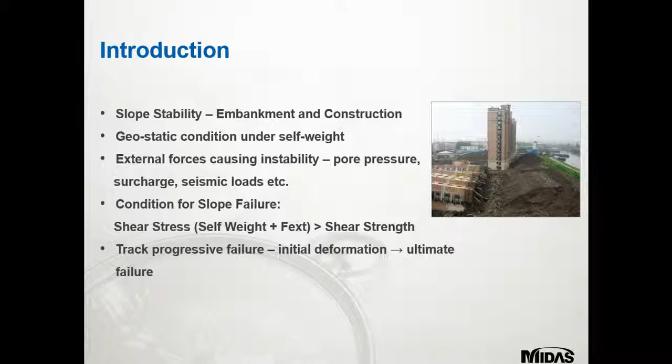Failure in a slope occurs when the shear stress generated due to the self-weight and external force exceeds the shear strength of the ground material, i.e. if anything's added to the slope, then it will cause it to fail. In any slope stability analysis, the important task is to account for the progressive failure surface. The failure starts as an initial deformation, which then propagates throughout the whole slope, causing the ultimate failure.

So just moving on to the next slide. So here's our graphics for this. As you see in stage 1 there, the slope is under geostatic condition, under its own self-weight, so it's completely stable. In stage 2, the instability is caused by external forces acting on the slope. As you can see, we've got the FEXT, or the external forces acting on it. And then stage 3, the failure occurs when the induced shear stress, T, exceeds the shear strength of the material. So as you can see, you've got T and W.

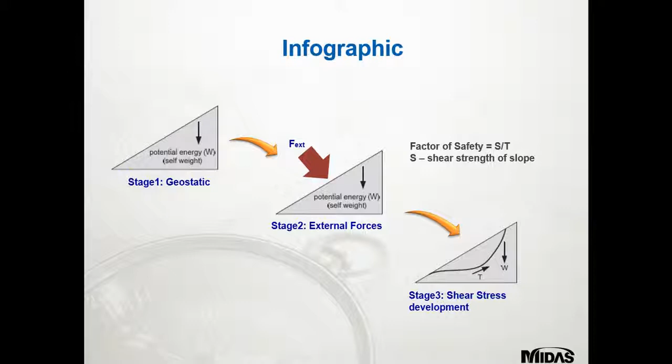So now we're going to focus on the numerical approaches for slope stability analysis. Two analysis approaches are considered: the limit equilibrium method and the finite element method. So first of all, we'll just focus on the LEM and the analysis principles. Divide the slope into vertical slices and calculate the safety by considering the equilibrium of forces and moments.

For the finite element method, it requires finite element modelling. Ground material is represented through constitutive models. Material behavior is non-linear in the form of the plastic and elastic method, or the elastoplastic theory.

So for the analysis results, you get the results for the factor of safety and the critical failure surface. In the finite element method, you get the results for deformed shape of the slope, the stress distribution, and the factor of safety. For the input data, you get the input cohesion and friction angle for soil layers in the limit equilibrium method, or LEM, which I'll constantly refer to during the webinar. For the FEM method, it is the input cohesion, the friction angle, the elastic modulus, the Poisson's ratio, dilatancy, etc. for non-linear analysis.

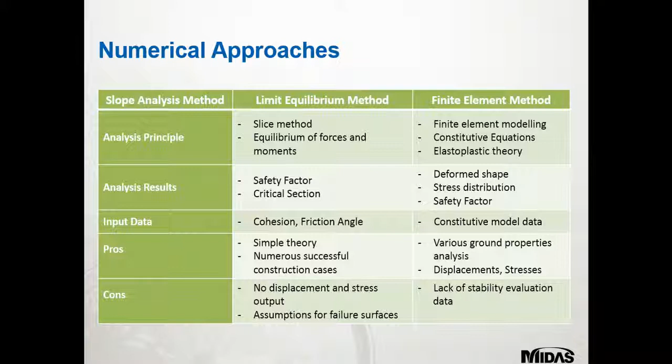So now we'll look at the reinforcement for slope stability. Just to start off with anchors, which increase the resistance of the slope against sliding. Anchors can be pre-stressed as well, where you can have the pre-stressing and part anchorage resistance to the movement of the soil mass. Nails are the most commonly used reinforcement. Nails are easy to implement as they require no pre-stressing, but that has to be compensated by larger cross-sectional areas, and based on the cross-section, the resistance could be axial or in the shear direction.

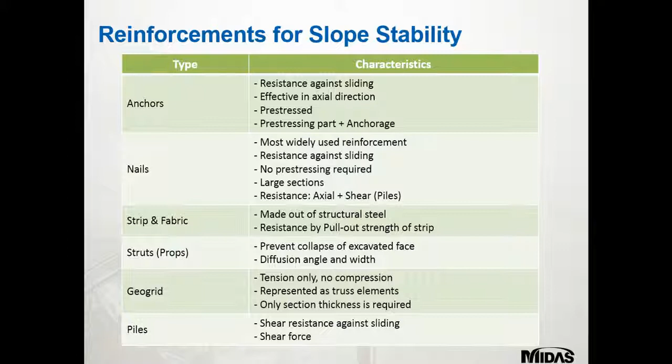So now just briefly talk about the strip and fabric, which is made out of a steel structural material and is resistant to pull-out stresses. It has a pull-out strength. Geogrids are reinforcements that resist loads in the axial direction only. Only tension is resisted and no compression is supported. Hence they can be represented as truss elements in finite element analysis. And just finally, piles. Piles can be used as reinforcements for slope stability. The main resistance against sliding comes from the shear friction along the pile shaft.

So just moving on to the finite element method, or FEM. Finite element is a precise method for analysing slope stability, as we don't need to make assumptions for failure surfaces. In finite element, for the model domain, force equilibrium, nodal compatibility conditions, constitutive equations for ground material and boundary conditions along model edges are satisfied. It simulates the actual failure mechanism and automatically determines factors of safety and failure behaviour in the slope based on non-linear analysis. In situ conditions based on pore water pressure profiles and other things of that nature can be best reflected in finite element analysis modelling.

There are two types of FEM models. The first one is the strength reduction method, or C-Phi method, and the second one is the stress analysis method, which is a hybrid of the limit equilibrium method and C-Phi method. Finite element analysis is an iterative process where for each iteration force and displacement compatibility is satisfied for each node. This increases the analysis runtime in finite element method analysis.

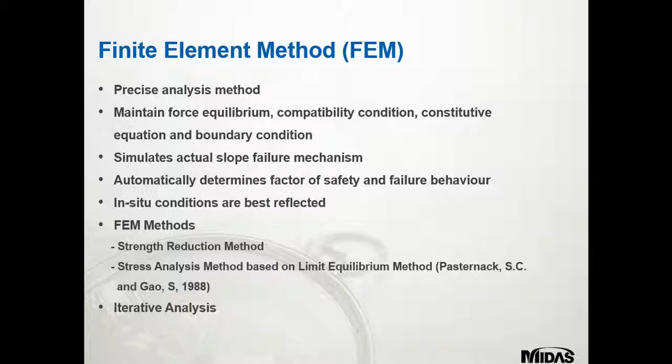The strength reduction method was proposed by Zienkiewicz in 1975. The shear strength parameters, cohesion and internal friction angle of ground materials, are gradually factored down till divergence occurs in the model. This is when the slope is said to be failed. Critical cohesion is given as C critical, which is C initial divided by the factor of safety, and critical friction angle is given as phi critical equals tan inverse of tan of the initial friction angle divided by the factor of safety, as shown in the expressions here on the screen.

It is important, to accurately obtain the critical factor of safety, that the increment should be made in small steps. Typically, the initial factor of safety is kept as 1 from Janbu's method, and then it is incrementally increased. While checking the results for ground deformations, the user should keep the value chosen for dilatancy and the dilatancy angle in mind.

When the dilatancy angle is equal to the internal friction angle, the yield surface and plastic potential surfaces are equal, making the stiffness matrix symmetric. This would cause faster convergence in analysis, but it might give unrealistic deformations. So when the dilatancy is lower than the friction angle, the computation time increases slightly, but the deformations are more credible.

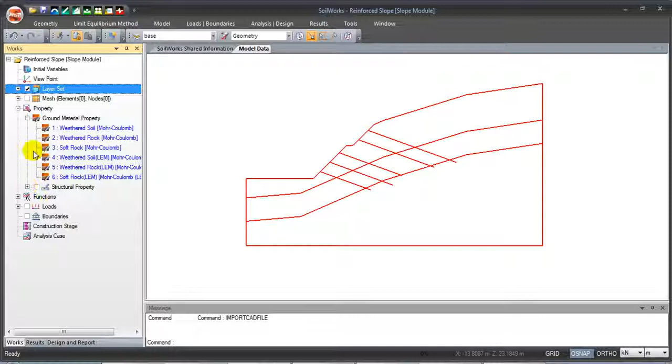What we're going to do is just bring in a CAD file and the geometry, so just the soil nail reinforced bank. I've got all the materials and everything predefined, and also the structural properties. If you want to create your own, you can just go into ground materials, select them all and manipulate all the properties. You can also create your own database - as you can see, I've got a multitude of different databases that have been created.

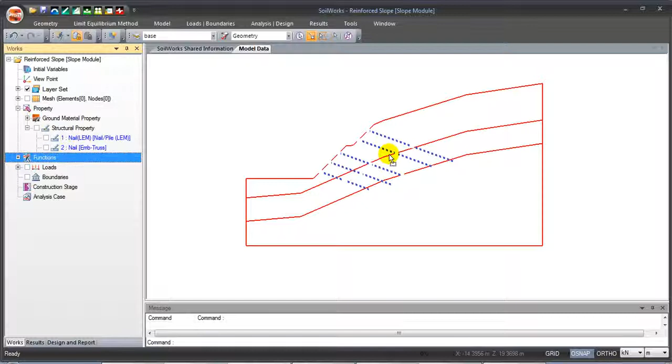So now I just want to define the nails themselves and make them into elements. I'll just select all of those, and we just use the neat drag and drop feature straight from the works tree, and those have been created. I just use the type in SS, which is the smart surface feature, using our CAD command line at the bottom there. You can also find it in the ribbon technology.

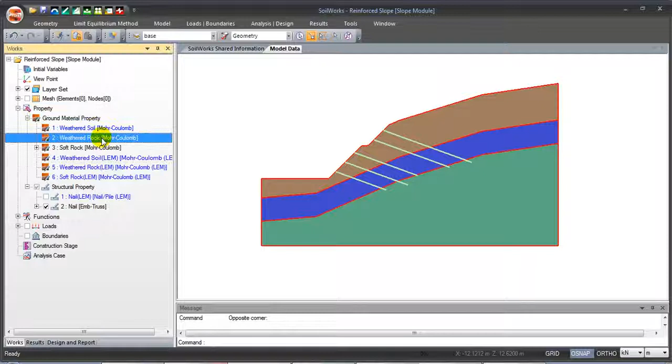So now I just want to create the strata, or the different material types, by dragging and dropping them from the works tree. So just take all the weathered rock, and let's do the top layer, which is the weathered soil, and we can also look at the properties for these as well. So here are the properties.

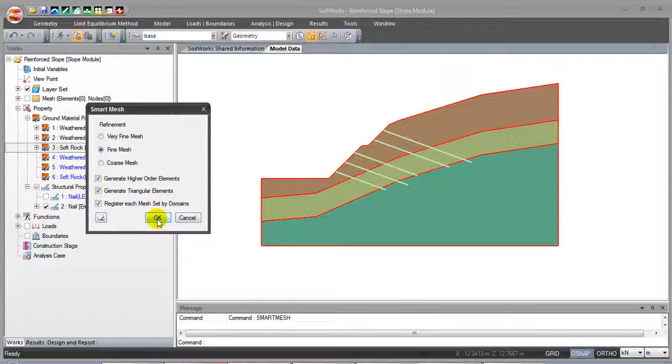So now I'm going to mesh these just using the smart mesh feature from the ribbon technology, which is a very fast thing to use. So just generate all the elements, and as you see, that's our mesh being created.

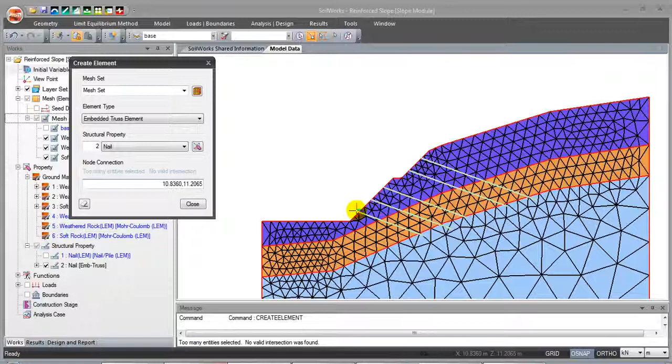So I'm just going to delete the mesh set for the structural nails. We can create mesh sets for structural elements using the existing ground mesh. So I'm just going to do that quickly now by creating an element. I just got to select all of them - you just select the nodal point, using the snap feature, select to the start and the finish, then just enter it and quickly do all 5 of these.

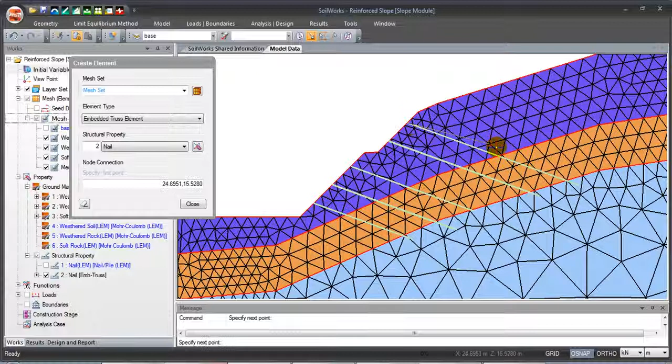So the modelling is very easy within the working space. Okay, that's all been created. I can check those in the actual window and also rename them, so I just want to rename them nails.

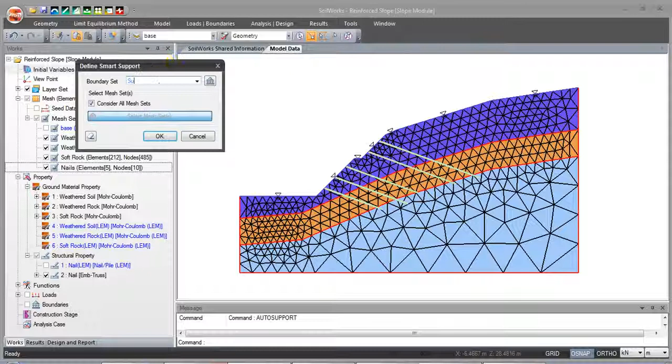So now I'm going to put the water level, so we can just quickly do that. We just select it, define the water level, just select the planes or the surfaces we're going to apply them to, and click OK. I just want to do the ground support conditions automatically, which is another neat feature within the program - supports, and as you see, it's just given the supports all the way around. We can check the supports in the works window.

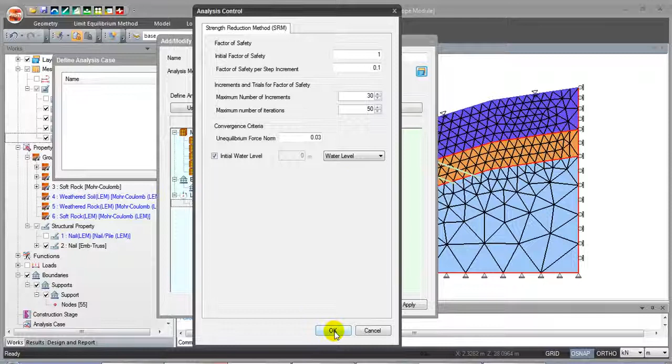So now we look at the analysis case and create the SRM analysis case. We just add all the meshes, all the boundary conditions, and all the load sets. Check the analysis control data, then the initial water level, and we just put a water level, which is what we've actually got on the screen. Then we just get a close, and that's that load set created.

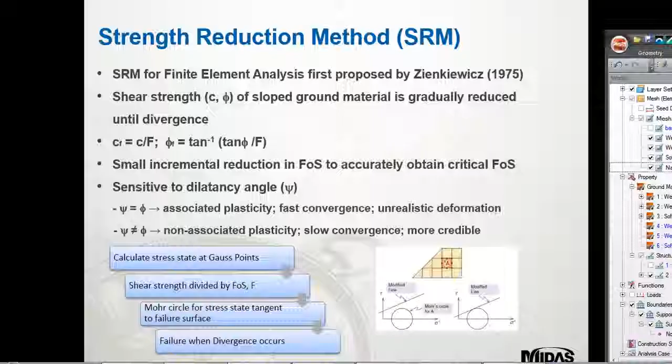So now going back into the presentation, I'm going to talk about - let's go on to the next slide.

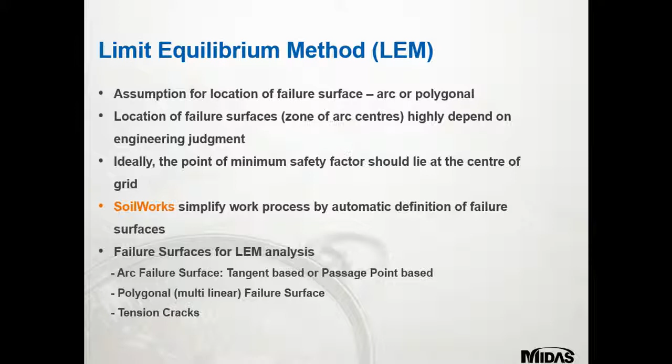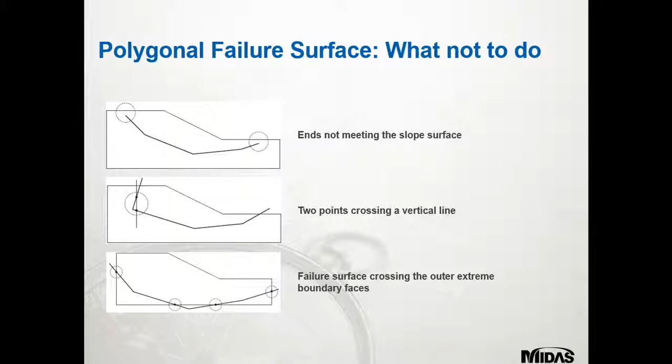The failure surface should emerge out of the model at both ends, and you see from the second diagram, no 2 points on the failure surface should lie on a vertical line, and the failure surface cannot go beyond the model geometry.

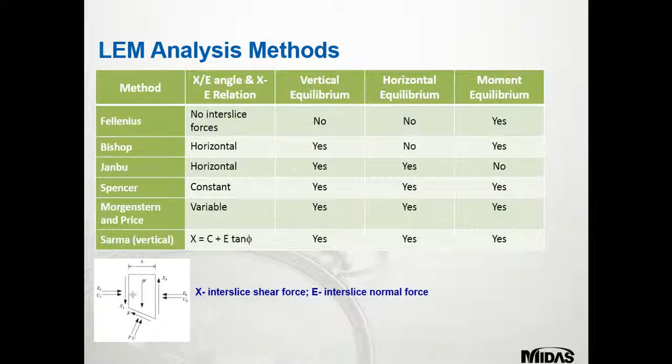Now we're going to go through the LEM analysis methods in more detail.

I'm just going to go straight through to the next slide.

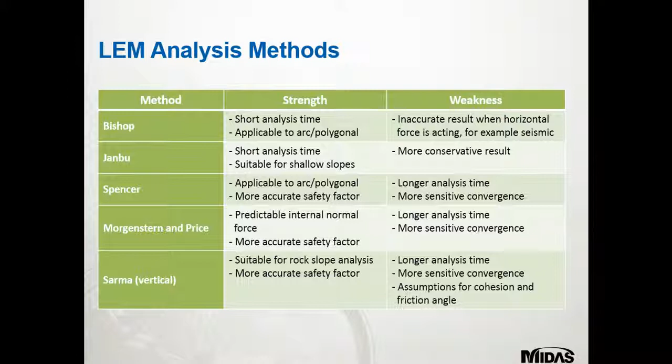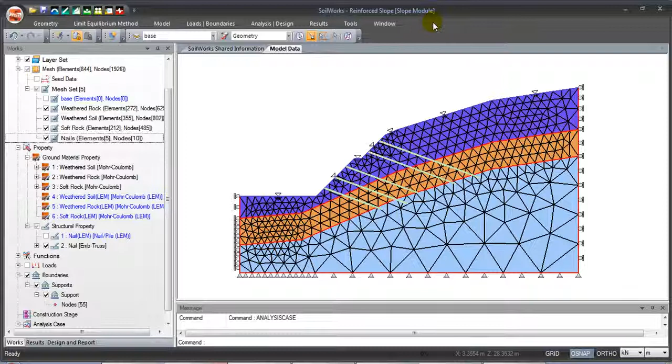Before we talk about the stress analysis method, we're going to go into the LEM and carry out some modelling. You can analyse a slope model by different analysis methods, and now I'm going to show you how to analyse a slope with the limit equilibrium method.

First of all, I'm just going to check off the mesh, the boundary conditions, and assign material properties to the surfaces.

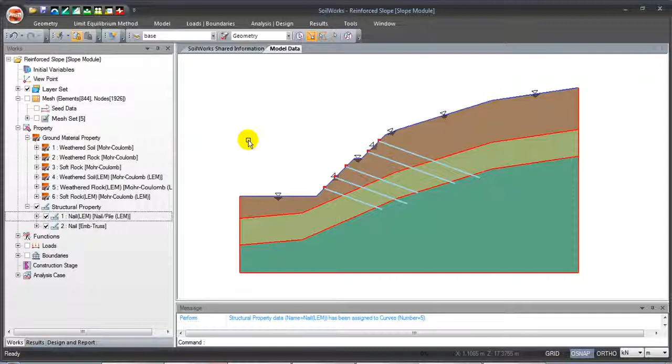I'll just drag and drop these across straight from the work tree, and we'll do the same for the nails. As you can see, it always turns black once it's been created.

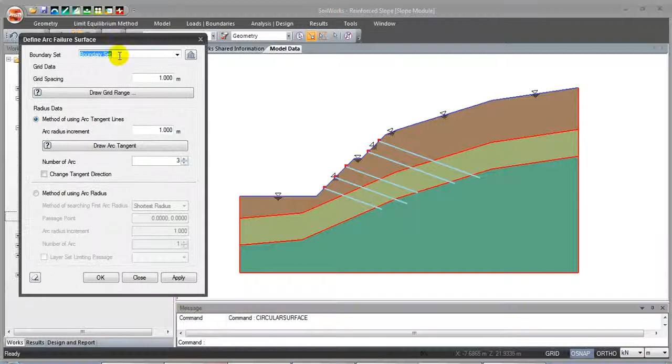Now I'm going to go up to the Limit Equilibrium Method ribbon tab and select and define the arc surface. I'll just call it Arc 1, and now we create the grid and the tangents at the top. Here's the grid being created.

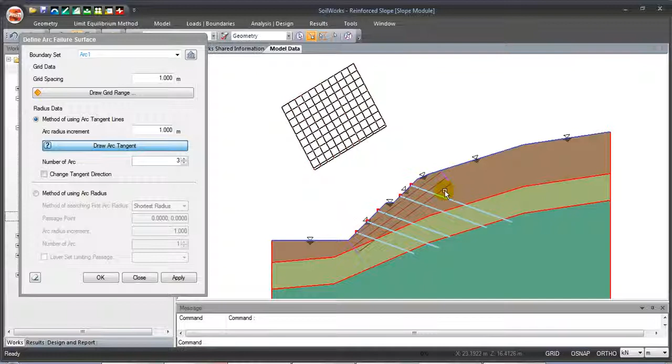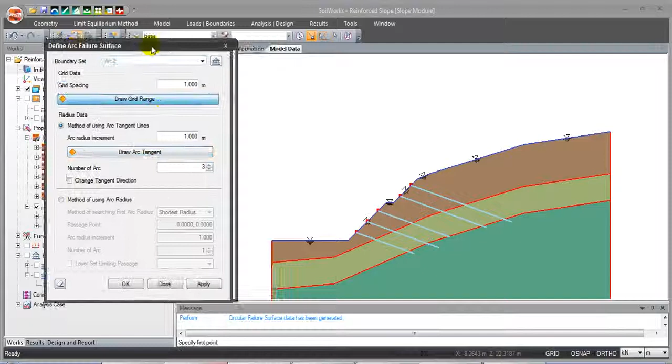We draw where the arc begins and where we want it to end, and we can put in the number of arcs we want to have, then just apply that. We can have a multitude of these, so we're going to create another one for a different case.

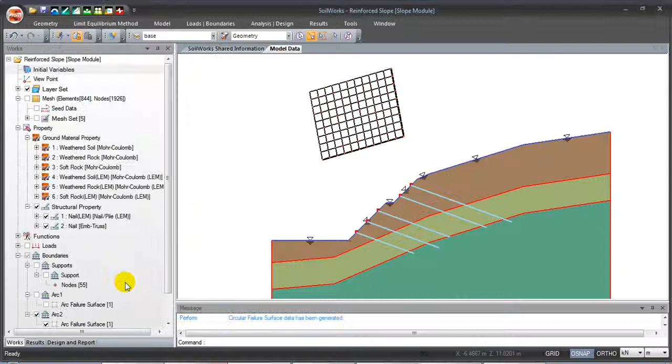And do exactly the same thing, but put the grid in a different location. We put the Passage Point, and the two points at the start and end of the grid using the snap. So just creating the Passage Point, and there you go - those are the two grids being selected.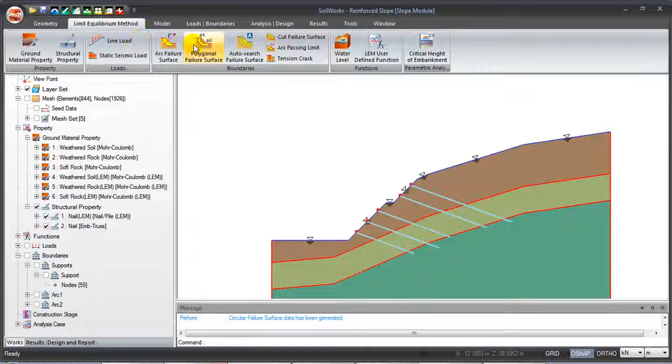Now I'm quickly going to turn these two layers off and go up to the Limit Equilibrium Method tab and create the polygonal failure surfaces. I just want to input the information there.

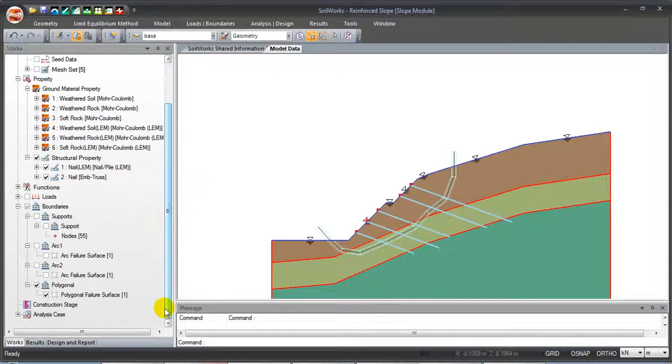We can select the first point and the end point, and use it like a spline all the way through. There you go, cutting through both surfaces, and the points come up as well. So that is our polygonal line created for our failure surface.

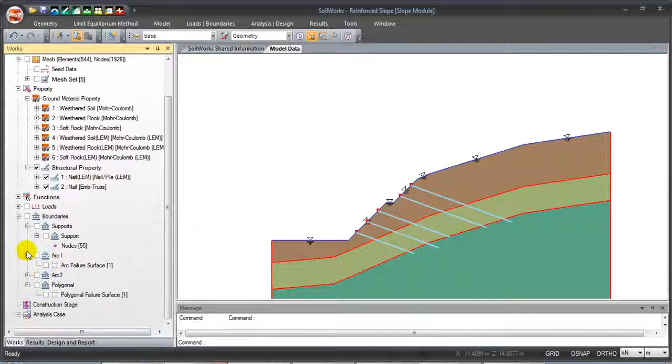Let's check these off for a second, then go up to the Limit Equilibrium Method tab again for the arc passing limits. Here we can limit the number of arcs for the analysis, and select where we place them - we're going to select them on the toe and the top of the slope. We can also put values in, so I'll demonstrate this now and then change the values.

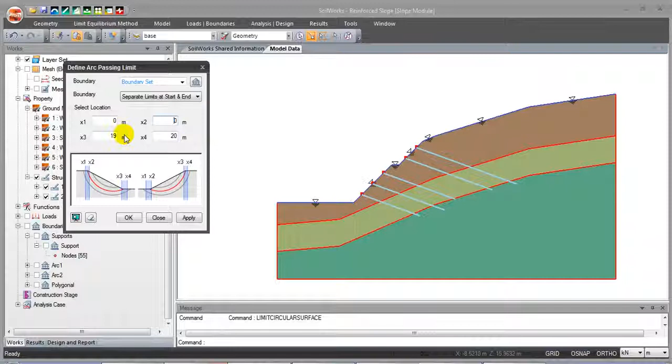Okay, so there we have the two effectively slices going down through.

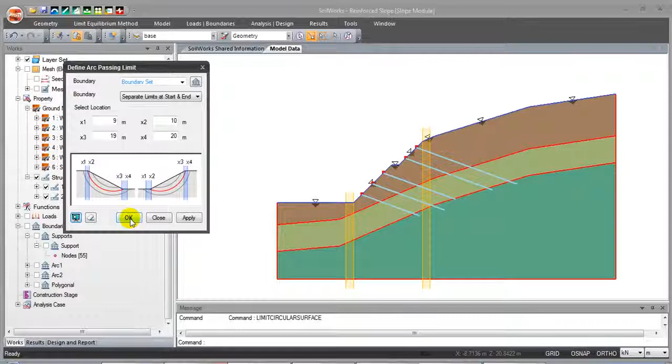Now I'm just going to turn off the boundary conditions and go up to the LEM tab again and create a line load - it's going to be a linear load.

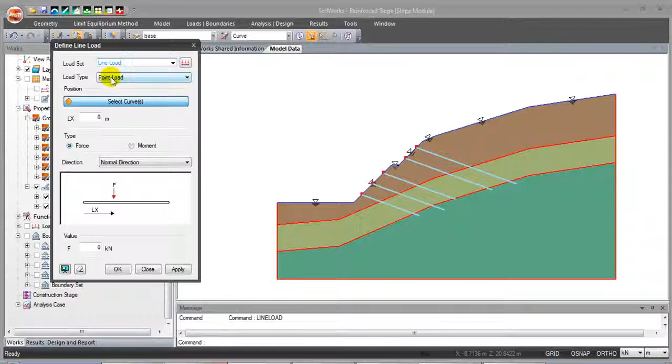So I just select the location where I want the load to be placed and put the number of kilonewtons - I'll put -10, -20. Obviously it can change from end to end.

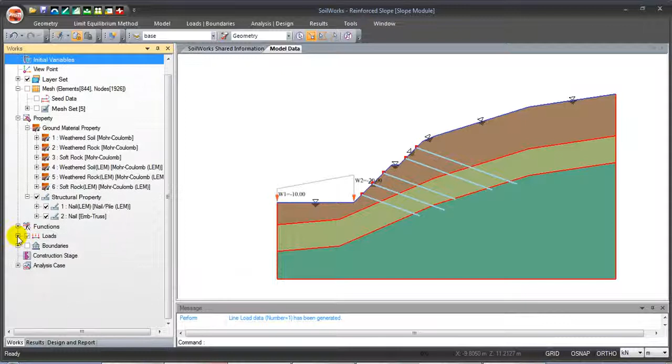Now it's going to create the analysis case for the LEM as well, so I'll activate the surfaces, add all the boundary conditions and add the loads. You can create multiple analysis cases in the same model file by choosing different loads and boundary conditions.

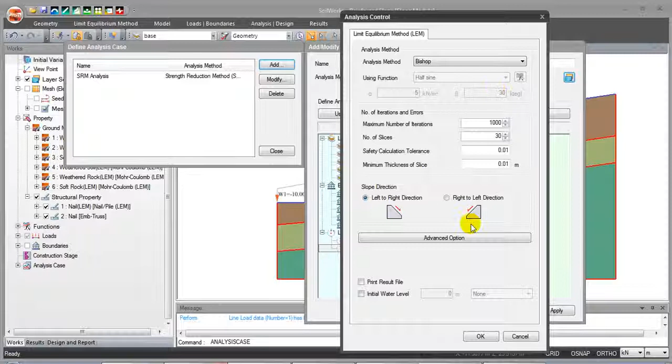Then I'm just going to carry out and optimize the design. I've also added the water as well.

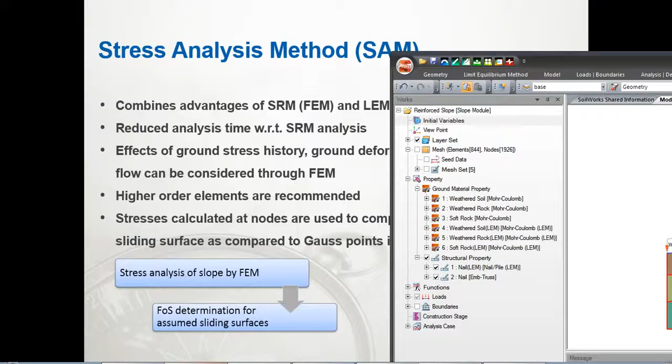So now I'm just going to go back into the presentation mode and we'll look at the analysis results after. Just going to look at the stress analysis method, or SAM.

The built-in stress analysis method, or SAM, in SoilWorks combines the accuracy of finite element analysis with the fast runtime of the limit equilibrium method. You can get the output for ground deformation, stresses, and pore water, through the finite element, with a considerably smaller analysis time, faster analysis time. Since stress is computed at each node in the model and then projected along the failure surface, it is recommended to use high order elements, or elements with mid-side nodes, during the mesh generation.

So just going to bring in the complete analysis model. In this model we've carried out 3 different types of analysis: the LEM, the SRM, and also the SAM.

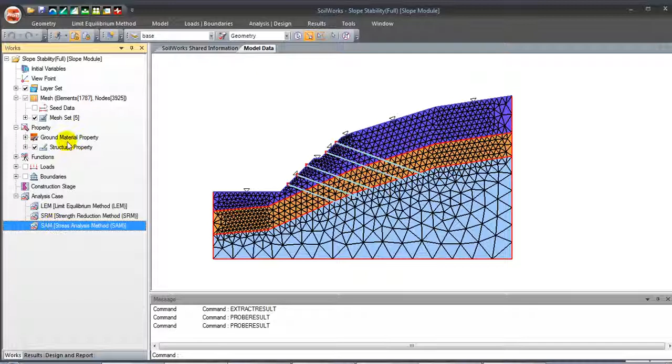So now I'm just going to go through some of the results. Just look through the strength reduction method and the factor of safety, which we've got there, which is automatically worked out. So we can just look at the effective stresses.

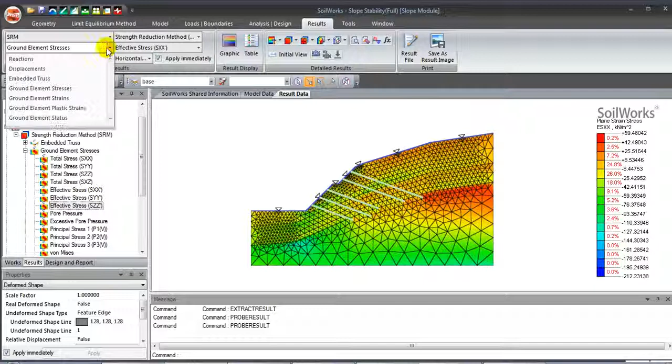You can also apply different loads and look at them in different directions from all the drop down menus. So I just want to look at the displacements and the total displacement. You see here, there is the plane, or the failure surface.

We can also look at the horizontal displacement as well, and that's also looking at the failure plane, and we get a nice graphic, and also we get the legend. We can change some of the different colours with it and do some results tagging as well. So we can just select it at any given area, and we can also get it in a table format.

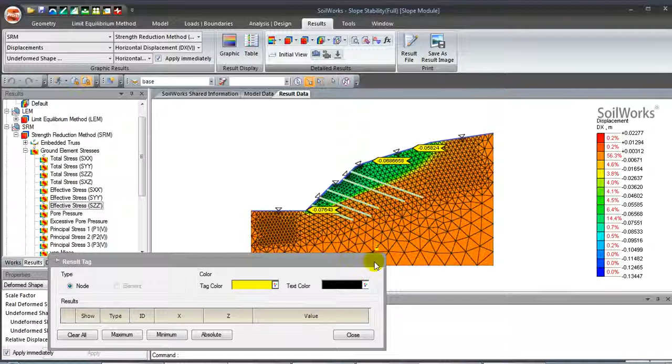So now I'm going to look at the extract results feature, for the SRM. So we just look at the horizontal displacements and strength reduction. We can just select a few points, and they're selected. We can look at them in a table format, and we'll get the results out.

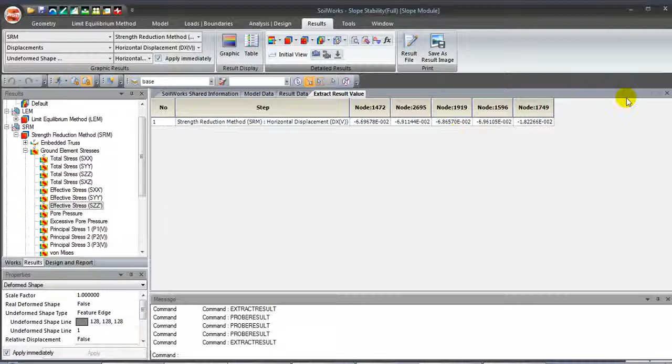So now we look at the results. Just going to close this window. Now we're going to look at the on-curve diagram. I've just selected it from the tab, and now the on-curve diagram is used to represent a results value for the on-curve.

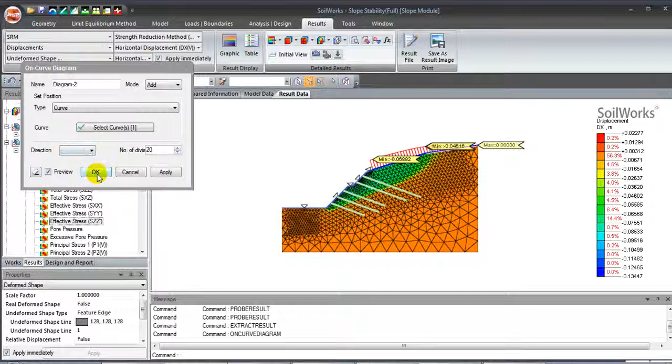So I'm just going to select that. So the 2 points, as you can see, I've selected the surface, and you can see the values as well coming up. So we can select any edge and plot the profile. As you see, that's come out on there.

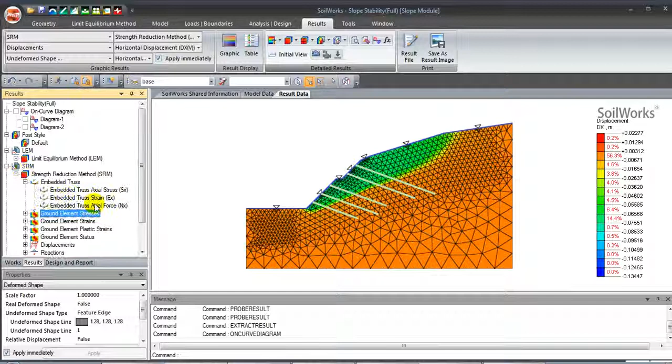So I just want to check off the diagrams. Now we're going to look at the forces in the structural elements, or in the nails themselves. So just look at the embedded trusses. As you see here are the forces, and we get the legend down the side as well.

I'm just going to switch to the pre-processing and turn off the mesh. Then we're just going to look at some of the LEM results. So that's the mesh switched off.

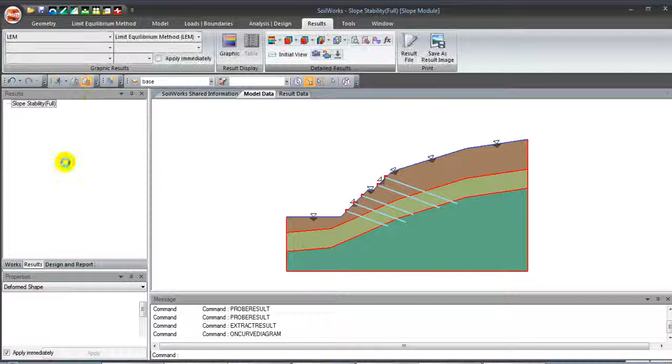So just look at the arc failure surface. You can see that's the results coming out there, and you can see the factor of safety is being created. And you can select different points for different arcs.

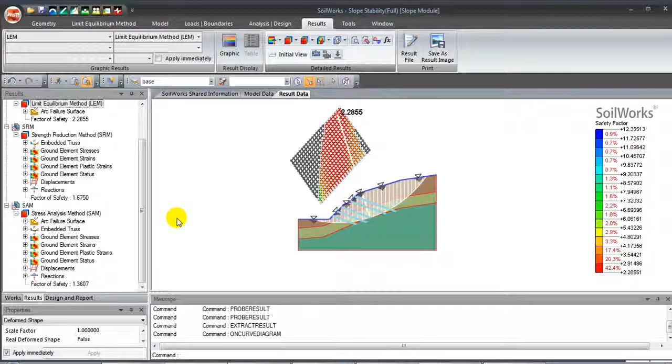So now we're going to look at the different factors of safety for the different failure surfaces in different methods. So the SRM, we can see it's got a 1.6 factor of safety. Look here for the SAM as well, and you've got a factor of safety of 1.3. So as you can see, we've looked at the factor of safety of different modes.

So this way you can analyse your slope with different analysis methods in the same model file. Then it will save time in the long run.

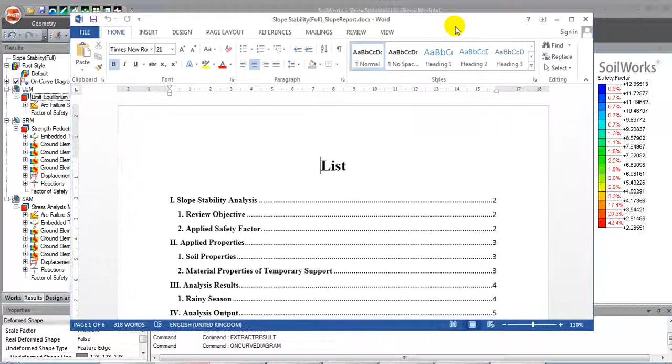So SoilWorks also generates a report automatically. This is a Word document, and it contains all of your different analysis types and drawings and tables. You see you've got the material properties and also their analysis results.

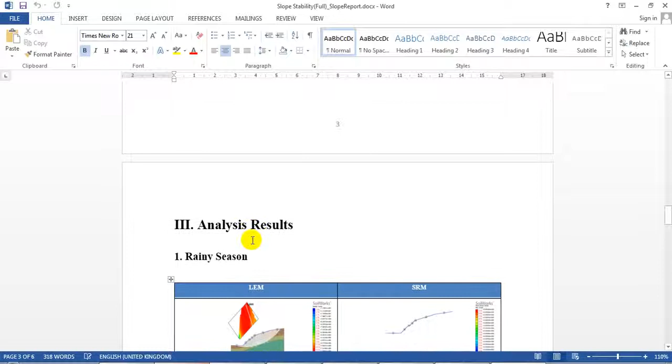So now I'm just going to go back into the presentation after showing you the report.

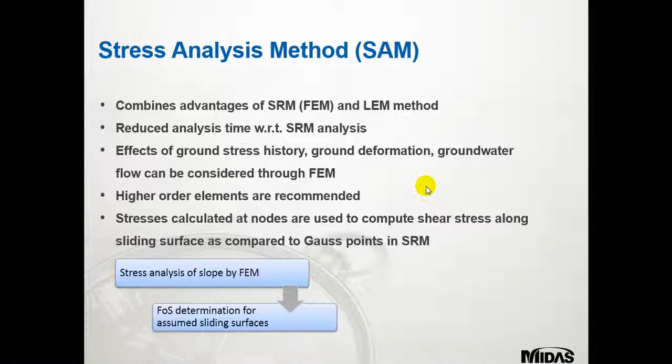So now just give you a summary of what we've just done in the modelling space. We've had accuracy of the results in slope stability analysis, and it depends on the geometry in your modelling space, the material properties for the ground and also the structural elements, loads, and the correct pore water pressure profile.

The analysis can be performed by either limit equilibrium or finite element methods. The limit equilibrium method is easy to implement, has little analysis time, but the results output is limited.

The finite element method gives results output for stresses and deformations, but requires setting up of mesh and longer runtime. So the stress analysis method, or SAM, combines accuracy and speed of the C-phi reduction and limit equilibrium analysis.

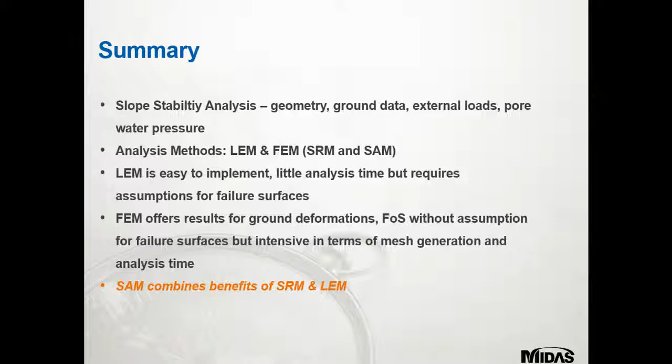So just going on to quickly cover why SoilWorks, and then going back to another model. SoilWorks offers an intuitive CAD-based drawing environment. You can build your slope model from scratch or import it straight from a CAD geometry. A slope can be analysed in 3 different ways, all in the same model, and thereby it optimises the design and speeds up your design process. The slope stability can also be coupled with consolidation and seepage effects.

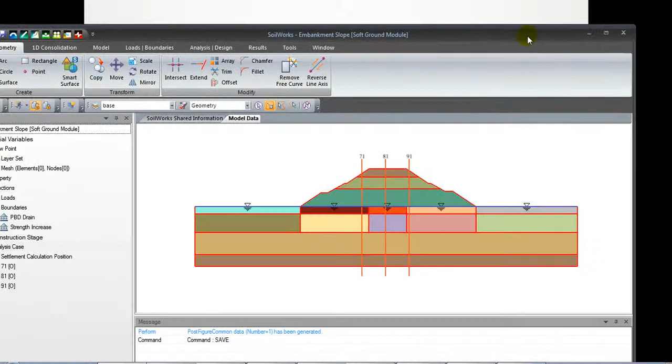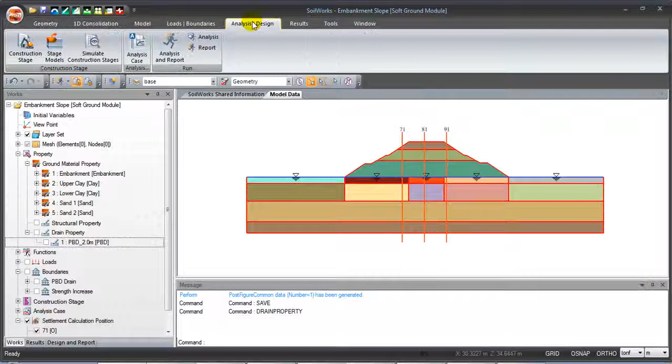Now I'm going to switch over to the modelling space and take you to a new model. So this is the model of the embankment construction on soft soil. I'm going to activate the PBD drains, which are installed to accelerate the consolidation in the clay layers. So we just selected those. And we want to simulate the construction stages. So we've got the different embankments there: embankment 1, embankment 2 and embankment 3.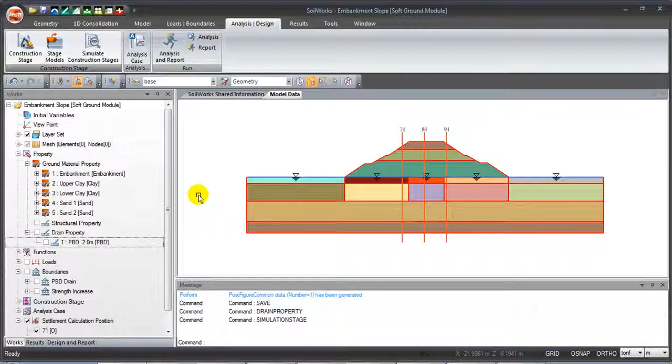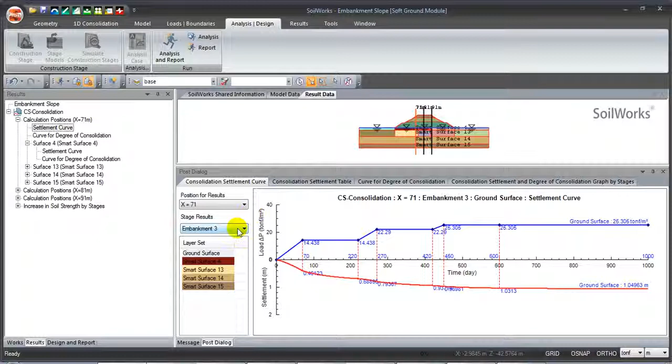And we're going to look at the consolidation analysis, which is performed in the soft ground module of SoilWorks. I've already analysed this model for consolidation in clay layers. So I'm going to go to the post-processing mode and look at some of the results. It's going to show the results for the settlement with different stages. You can see the settlement of different stages in this graphical form down at the bottom. We've also got the settlement in a table format through the different stages.

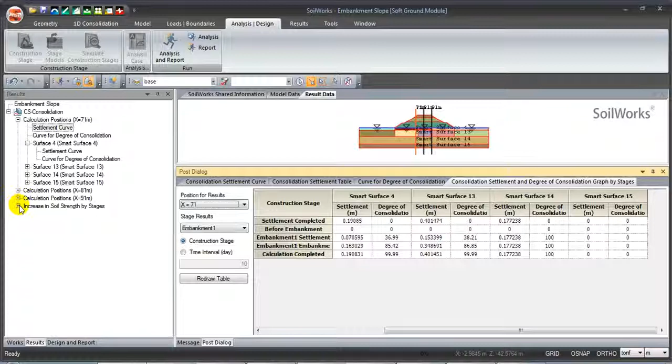We can also look at the consolidation settlement and degree of consolidation graph by stages as well, in time intervals if we want to. We can look at the increase in soil strength by stages: the ground stress, the increase in strength, and also the tons per metre squared. As you can see, the ground strength increases with the stages as you increase the volume of material on top.

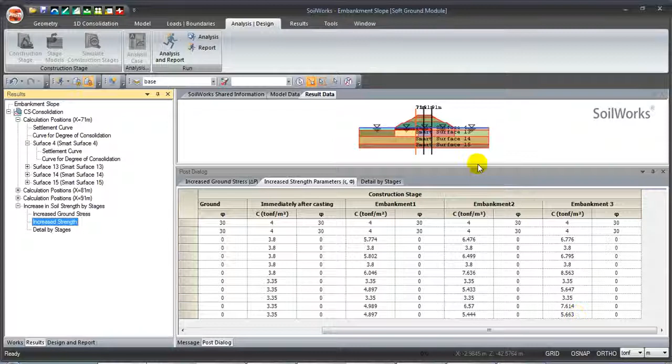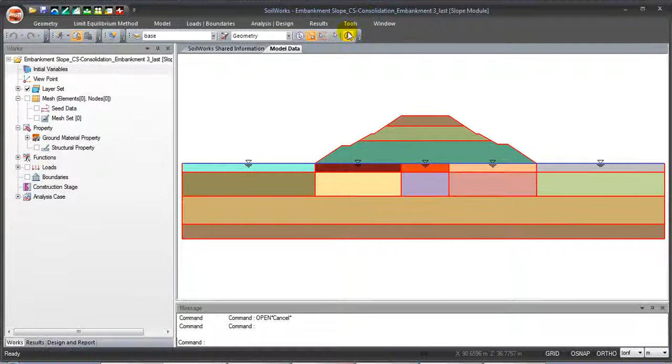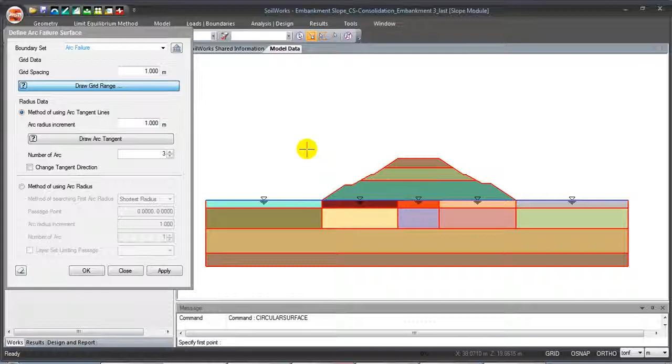I'm going to go over to 1D consolidation and export this model over into the slope model. So we've made this into a slope model, and now we want to bring across the actual slope module with it open inside. As you see, we've opened the model in the slope stability function. Now we're going to create an arc surface. Let's name it arc 1, and this is the limit equilibrium method. So just create our grid, and then we're going to draw the arc.

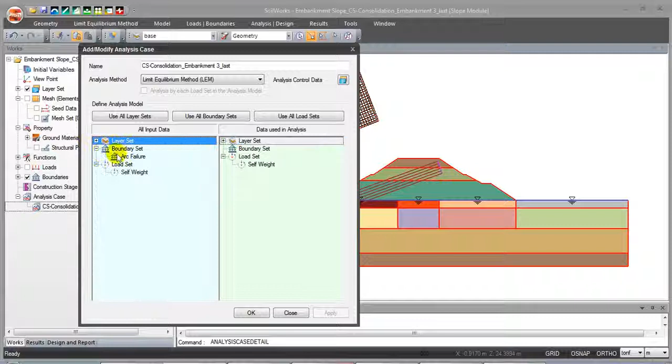Okay, we want to switch that up to 5, 6. That's been created. Now we want to carry out the analysis. Modify the analysis case quickly first. Everything's been highlighted in there. Drag and drop it all across. I'm going to run the analysis very quickly, just for the construction of the embankment. Now I'm going to show you the safety factor. You see that?

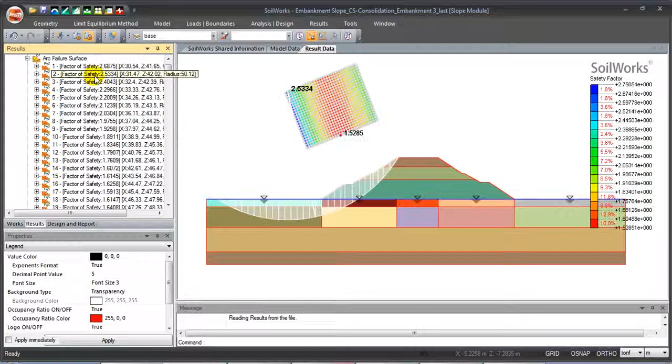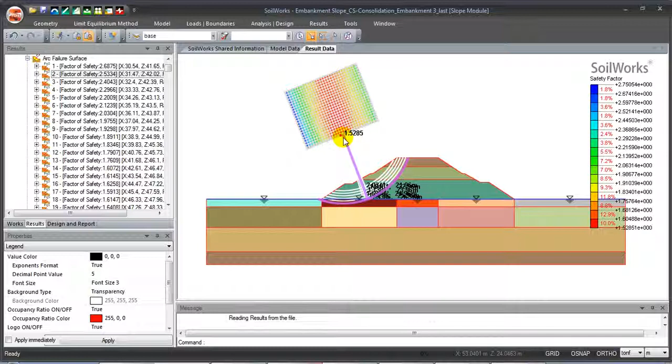As we see, we can do exactly the same thing we did previously by picking different points and finding the different factors of safety and the arc surface. Now that we've taken this model over into slope stability, this way we can couple the consolidation analysis with the slope stability for embankment construction on soft soils. And now I'm going to take you straight back into the presentation and close.

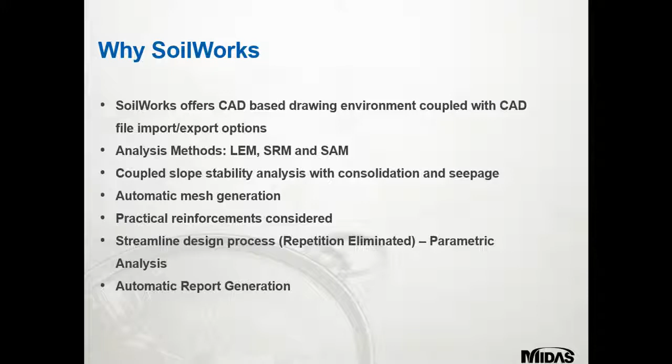So now we're back in why SoilWorks, and we're going to discuss the last few points. The robust mesh generation features generate automatic mesh for any complicated geometry, which is a really neat feature within the program. Practical reinforcements such as nails, anchors, piles and geogrids can be considered, and you can select them from drop-down menus very quickly and efficiently. The parametric and coupled analysis features streamline your design process and increase efficiency. And the automatic report generation is in Word format and includes the analysis results tables and images, which makes it very easy for you to move on with your design process.